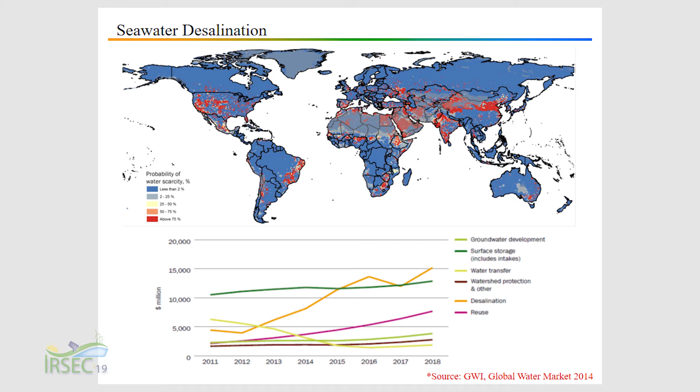We all know desalination is the fastest growing market in water treatment, and this was actually the prediction for 2018 - we almost doubled that prediction in market share. So desalination is going to grow further, and because of the energy consumed by desalination, either thermal or membrane, we will have to consider it as a major energy outcome from wherever we are working.

So first, the thermodynamic limits. When somebody talks about energy, when you mix salt and water there's a certain energy release - it's called the Gibbs function here, and it's the basis of the second thermodynamic law. If you mix salt and water, the release of this energy has to be given back to the system in order to separate them. This is the law. This is the thermodynamic law. You cannot break this law.

So we have to understand first, if you want to separate water from salt, you have to give back this energy. This is the mixing energy, and in desalination we call it the Gibbs free energy of mixing.

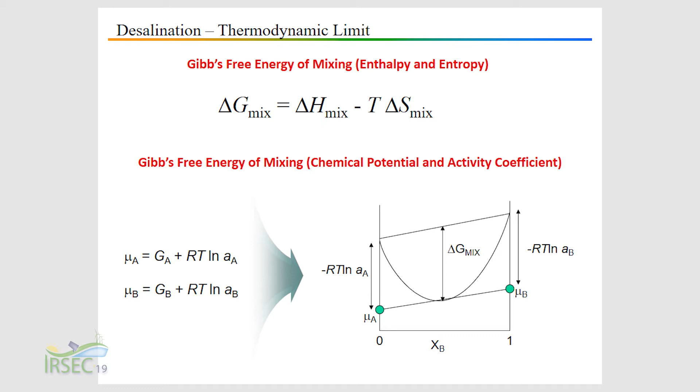If you look at the thermodynamic limits, we can convert this into pi, which is the osmotic pressure. So this mixing energy is directly related to osmotic pressure, and by using this osmotic pressure we can calculate how much hydraulic pressure we need to reverse it. If we have enough hydraulic pressure in the opposite direction of the osmotic pressure, then we can start creating water. The reason we do this depends on, in desalination, how much water you want to draw - a 40% recovery needs a different hydraulic pressure than a 60% recovery. The reason is this process is dynamic.

At the beginning of desalination, you might need only 15 bar of pressure, and that's for the zero recovery point. But if you want to remove 50% of the seawater as drinking water, you have to apply the osmotic pressure at that concentration. So this is very important - when somebody tells you about recovery, the most important thing is what percentage and what pressure you want to use.

Of course, we add around 20% additional pressure to compensate for the losses within the system. So we have a process running at this pressure, and you have irreversible losses from the process itself that you cannot recover. This is based on the thermodynamic limit.

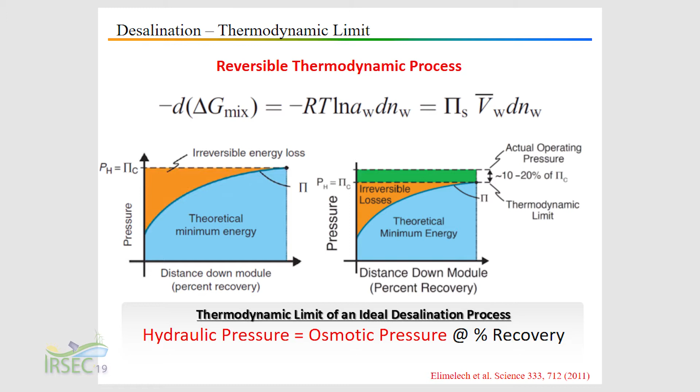If somebody talks about the thermodynamic limit in an ideal desalination process, which means there are no losses, your hydraulic pressure has to be calculated based on the osmotic pressure at the percentage recovery. If you go to the Middle East where you have seawater of 56,000 TDS, at that point 50% recovery doesn't make a lot of sense - 50% recovery will put your brine at 120,000 ppm, and at 120,000 ppm you need around 100 bars of hydraulic pressure. So we have to be very careful about which water we are talking about, which recovery we are talking about, and what the conditions are. There is a lot of misinformation in the water sector.

A lot of people come and claim, we do this, we are the best, we can do 60% recovery in this water. We have to approach it in a much more careful manner.

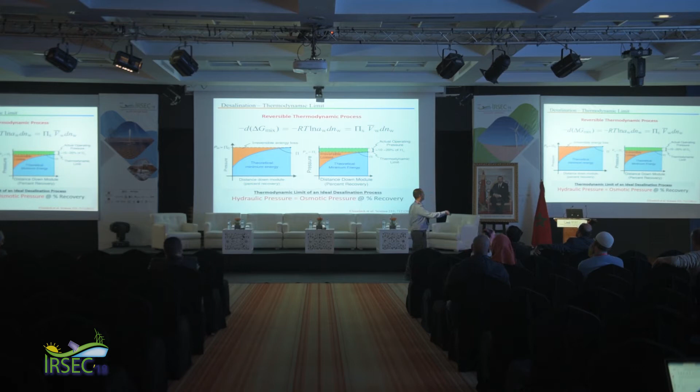If you look at the minimum theoretical energy consumption, if your TDS is 35,000, this is around Mediterranean Sea level, at 0% recovery when you get the first fresh water out of the membrane, the first drop, you have to put at least 0.7 kilowatt hour per cubic meter of energy to get that first drop out.

If I want 50% recovery from the Mediterranean-based salinity water, you have to put at least 1 kilowatt hour per cubic meter. So this is the thermodynamic limit for this TDS and for 50% recovery.

It will be different if you go to the Middle East, it will be different if you go to the Black Sea between Turkey and Russia, it will be very different in Singapore.

The other thing is theoretical and actual energy consumptions are also different. The theoretical minimum we said was 1 kilowatt hour. You have 20% practical losses from the pumps, from everything, so let's say 1.2. The actual minimum for SWRO, because we have a lot of losses along the way, a lot of pumps and recycles and whatnot, is 2 kilowatt hour per cubic meter.

However, this does not include any pretreatment, any intake, any post-treatment. If we include all of those, the number you get is between 3 and 5, depending on a lot of different things.

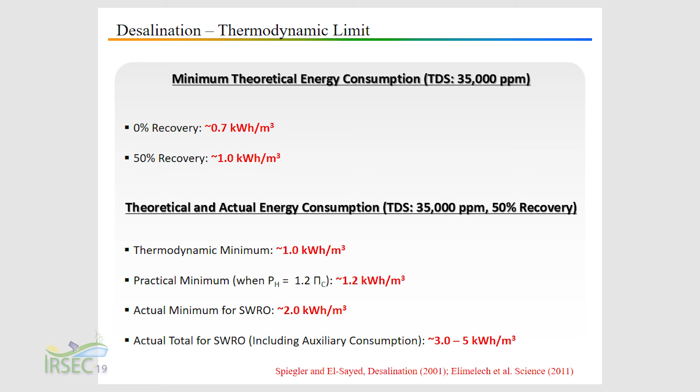So if you look at it, where we can save the money, where we can save the energy, is based on osmotic pressure here, in the reverse osmosis process, which is only just below 70%, and 41% power for the entire system. So the actual energy savings here is already capped at 30%.

If it's a zero energy process, the maximum you can save is 30%. So you have to be very careful.

And this is what we come from. Before this device, called an isobaric pressure exchanger, it recovers the pressure from the brine and gives it back to the inlet. Before that, we were working around 7 kilowatt hour per cubic meter.

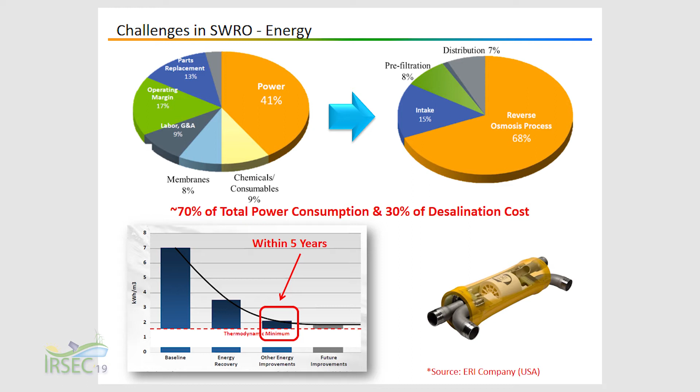What happened after this device, we went down to 3.5 depending on the intake. Now what we are looking at is right about 2 kilowatt hour per cubic meter, because your thermodynamic minimum is right here. So we are hoping within 5 years.

This is a typical desalination plant. This was done for high TDS seawater in Qatar. We did this one for 42,000 ppm. You have intake and pretreatment.

You have a fixed power consumption, first stage SWRO and second stage BWRO. Why do we have two stages? Because membrane desalination does not give you enough water quality in the first pass. Almost every case, we have two stages.

We have to bring the TDS around 25 to 50 ppm so we can reconstitute it with calcium carbonate. Otherwise, it will be very dangerous to the distribution line.

So we have two stages of reverse osmosis and an outfall structure. This is around 3.8 kilowatt hour per cubic meter.

The only possible energy saving here is from the first stage SWRO. Why? Because all the other processes are already being optimized years and years in advance.

If we look at it, if we calculate what is the minimum theoretical and applicable maximum specific energy consumption reduction for the whole process, for the SWRO process, it's 23%. We can reduce only this part by 23% if we apply new technologies.

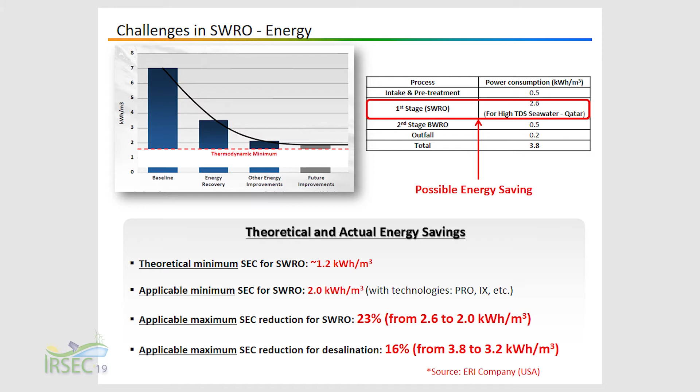If we expand this to the entire process, our savings should be capped around 16, maximum 18%. So this is the limit we are working with. No matter what technology you come up with, no matter what you do, this is the savings you can add to the process. So this is very important to start with.

The reason I'm going here is because the first thing I want to talk about is forward osmosis. When forward osmosis came out, they said this is a natural process. You don't need any power, you don't need any pressure, the water just flows by itself.

But again, that flowing water by itself - on the other side, the draw solution, you have a very high osmotic pressure, which means that osmotic pressure already has a Gibbs free energy of mixing already released. Then you have to separate that, the draw solution. So that was a big problem.

And we learned a lot of stuff. We can say 50%, 60%, I will produce water for free.

We heard a lot of things for 10 years. A lot of people get a lot of projects, they get very famous. But now, when we look back, we can see the difference between what really happened and what was promised to be happening.

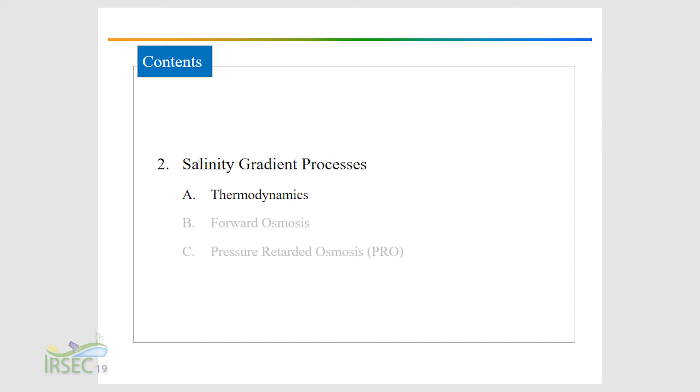First, the thermodynamics. I'll go simply. Let's say we have an osmotic agent here, and a feed water, and we separate them with a membrane, a selective membrane. If we do nothing, the feed water with no salt will flow through the membrane and increase the volume on the osmotic agent side. This is forward osmosis, a natural process.

We can add additional pressure to the feed water and increase the flow rate from feed water to salt water. This is called pressure enhanced osmosis. We can also apply just enough pressure to the osmotic agent, not enough to stop the flow, but enough to keep the pressure constant and sustain a suitable flow from one side to the other. So in pressure retarded osmosis, we are not reversing the direction of the flow.

If you apply enough pressure on the osmotic agent, then this is reverse osmosis, and you can produce fresh water. So this is basically the mixing of salt water and clean water. We have oceans, rivers, a lot of different salty and non-salty water sources. It's predicted that we have 1,700 terawatt hour global potential coming from this.

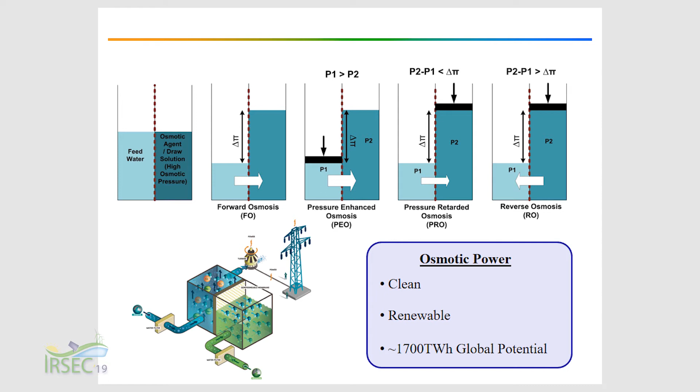But there's also an exergy idea of how much of this power can actually be converted to workable energy. If we're talking about 5 ppm salt water with 0 ppm salt water, mixing this won't give you any energy because it's so small that the power you're trying to recover is lost in the system, since your system has inefficiencies. Nothing is perfect. So for the thermodynamics, this is the flux.

What I want to say here, I'm not going to go into too much detail. All the research we do about forward osmosis, we use reverse osmosis experiments to find the constants. For example, A here is the permeability constant for the membrane. We find that by using reverse osmosis experiments, which doesn't make sense because as we saw, the flow patterns are completely different. We don't have positive pressure in forward osmosis. On the other hand, reverse osmosis is based on hydraulic pressure.

We also use this experiment to find the salt permeability coefficient the opposite way, and we calculate our S parameter, which tells us the thickness of the membrane we need. It's very important for membrane development. We found all of these by only using the reverse osmosis experiment. So there's a big mistake we are making, and when we have experimental results coming from this approach, that S parameter is very different from what companies actually find, like Toyobo, Toray, when they apply this in the process.

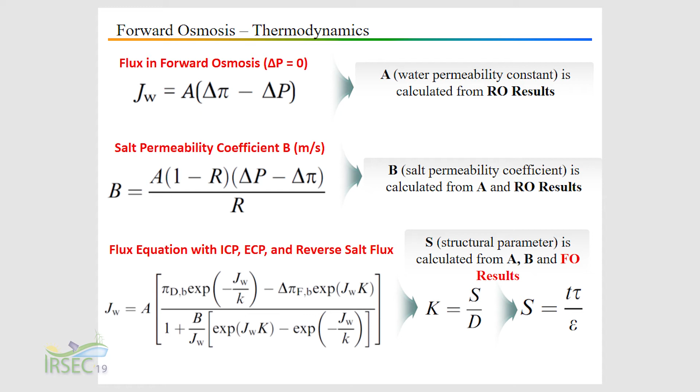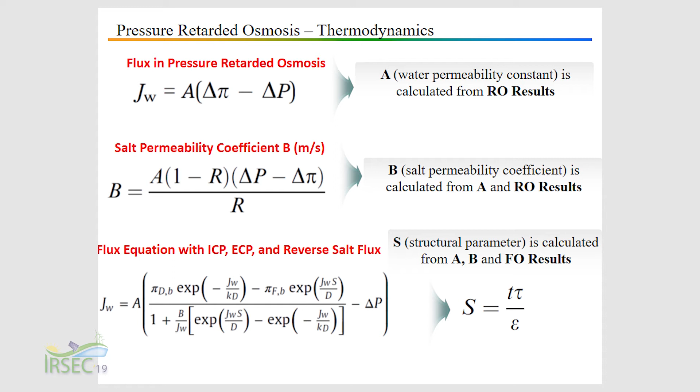It's very similar to forward osmosis. The only difference here is now we have a hydraulic pressure on the same side as the reverse osmosis, but again the flux and the salt reverse flux are in different directions. What we do here, we again often use reverse osmosis experiments to find these constants and important parameters, and then we calculate our process and how efficient our process and membrane are in this application.

We start with forward osmosis. There are a lot of mistakes we are making. First, the forward osmosis itself: we have a draw solution, high concentrated, and a low concentrated feed solution. If we give these to an FO system, water will flow through the membrane without any pressure requirement. However, when you have a diluted draw solution, this includes your product water as well, so the water drawn through this membrane is now mixed and not pure and clean. You have to have a very solid recovery system to recover the draw solution back to its original concentration, so you can have a high osmotic pressure to draw, and you need a product that's pure enough to be used as drinking water.

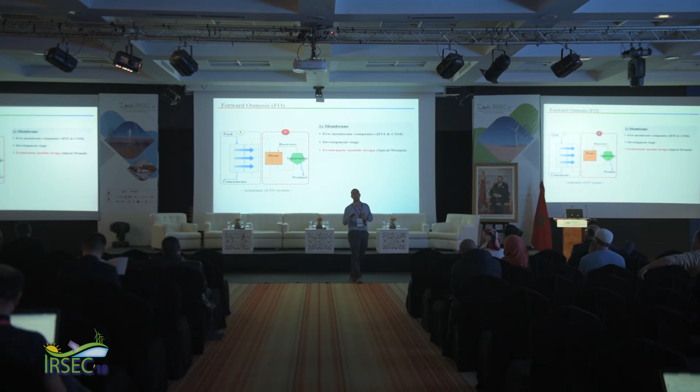First problem we have is the membrane. We generally have flat sheet membranes that we can engineer using the S parameter I mentioned. We can make it very thin, microvoid, and use a lot of other techniques. However, the spiral wound module is a big problem. We have a huge dead space, around 70% of the surface area is lost. I'll talk about it in the next one.

And for the hollow fiber, we don't have a lot of companies working with it. We have two big research groups from Singapore that focus on hollow fiber membranes, but there are no membrane companies actually supporting FO membrane production in hollow fiber form.

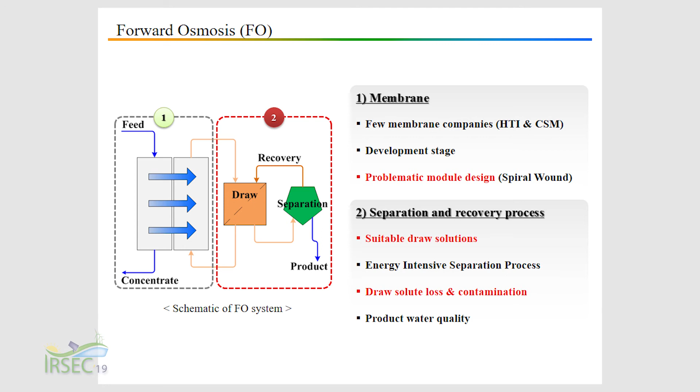The biggest problem, however, is the separation process. This separation process actually requires more energy than the desalination itself. That's why we don't have a lot of direct application of desalination when it comes to FO, but FO has been around for 12 years. If there was a potential, we should have seen it by now. So we need to find a suitable draw solution that has a very high osmotic pressure and can be separated from the product easily, which, as we saw, is thermodynamically almost impossible.

You have to have a magic draw solute. And even if you have a way to separate the draw solute efficiently, the FO membrane is not perfect, meaning you have a reverse salt flux, so you're losing draw solute every time. Even if it's 0.1%, after 100 batches you lose 10% of your draw solute. Similarly, you're not rejecting 100% of the salt from the FO membrane, so you're poisoning your draw solute with salt while also leaking draw solute through the membrane. After 5 to 10 cycles, your draw solution is useless. You have to dump it and put in a new one. So there are a lot of issues.

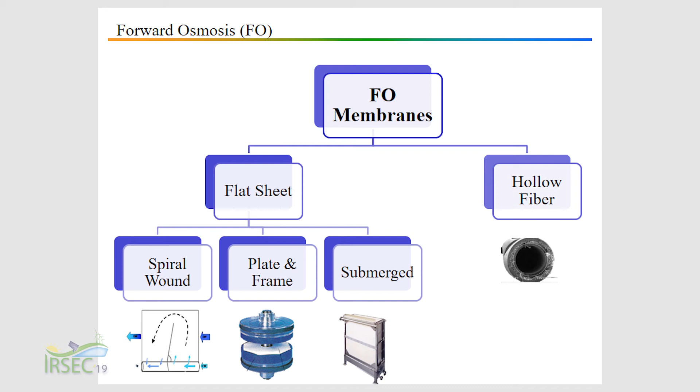For the membranes, we have flat sheet membranes. A lot of research goes into flat sheet membranes because they're easier to work with and companies are more interested. For modules, you have spiral, plate and frame, and submerged configurations. We tried almost all of them over the years. Some work, like submerged, but then you have a problem with packing density—you need a huge area to apply submerged FO processes. And we have hollow fiber membranes, but as I said, not a lot of companies are interested.

Flat sheet membranes—CSM, now Toray Korea, and HTI—are very interested in this. This is a flat sheet membrane. You can engineer the microvoids, adjust the S parameter and the thickness. It's a highly engineerable product. However, when you put it in a spiral module, because of the shadowing effect in the forward osmosis process, these envelopes collapse on themselves, and you lose around 70% of the active area. So in the laboratory, you try a little coupon and get huge flux—70 LMH, 90 LMH. You roll it into a spiral wound module and get 10, if you're lucky. The reason is you don't have a good system to pack all those membranes into an applicable configuration.

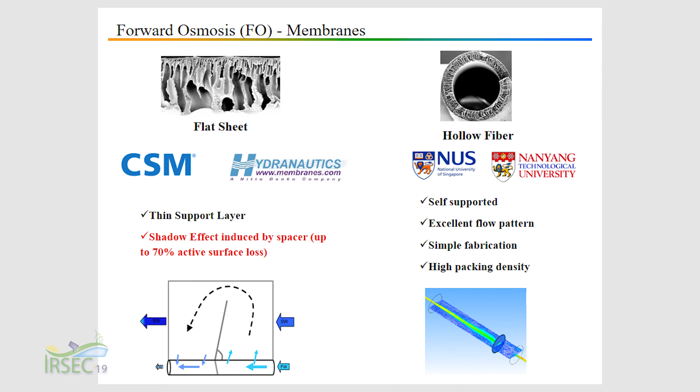Hollow fiber membranes are perfect. They are self-supported, meaning you can keep the S parameter as small as possible—you don't need much support layer. You have an excellent flow pattern because everything flows on one side, and you can use 100% of the surface area. It's simple to fabricate, and you can have twice the packing density compared to flat sheet. However, none of the big membrane companies believe FO will actually make it in a hollow fiber format, so there's no commercial future at the moment from the membrane companies.

We tried many draw solutes over the years—inorganic volatiles, organic volatiles, polymeric membranes. The idea is how we can create a huge osmotic pressure and then remove it with low energy. So far, after 12 years, there isn't one draw solute that can make the desalination process more efficient than reverse osmosis itself. So there's a big problem for the research.

If you want to do direct desalination, you could use FO maybe for seawater pretreatment—maybe, depending on the seawater quality. It doesn't mean it can be applied everywhere. But you still have a lot of problems with draw solutes and draw solute recovery, and you have to look at rejection efficiencies and reverse salt flux problems. If you want to use it as part of desalination and reuse, you use treated wastewater on one side and dilute your seawater with it, which lowers the osmotic pressure on the seawater so you can reduce energy consumption in reverse osmosis. However, again, you have a problem with pretreatment, because even though people say forward osmosis doesn't foul, it does foul—sometimes more than reverse osmosis itself, because you don't use much pretreatment for forward osmosis.

If you do use pretreatment, then you actually don't need FO as a pretreatment for seawater. You will still need a guard membrane, probably a UF, you still need a DMF, and probably a DAF, depending on what kind of water you are using.

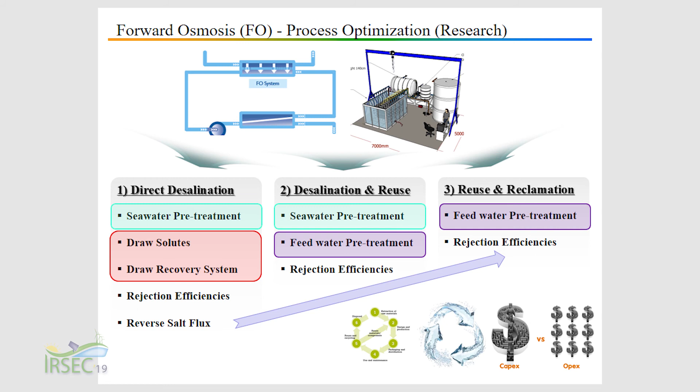You can just use it for reuse or reclamation, where you are not trying to produce water, just using this as an addition. Or you can use it in a niche application like they did in Australia. They used very concentrated fertilizer, so you can ship it in a small container, and on site they can use forward osmosis to dilute it before giving it to the crops.

Or like they started in China, you can use it for juice production. When you're concentrating juice, you can use forward osmosis. You put high sugar concentration on one side as a draw solution and juice on the other side, concentrating the juice and diluting the sugar water. What do you do with this sugar water? You rehydrate dried fruit that comes from Africa or South America. So there is no waste, but there is a niche application.

However, those niche applications don't include any desalination, okay, so far.

Of course, we always have to look at the CAPEX, capital investment, how much you are paying. When you add forward osmosis to a reverse osmosis process, you increase your CAPEX around 60%. So it's a huge investment, and you have to make sure it's compensated with operation cost savings.

The second one is pressure retarded osmosis. In this case, we are not talking about water production, we're actually talking about energy production. So our end product is different. We can actually produce energy directly by mixing salt and fresh water.

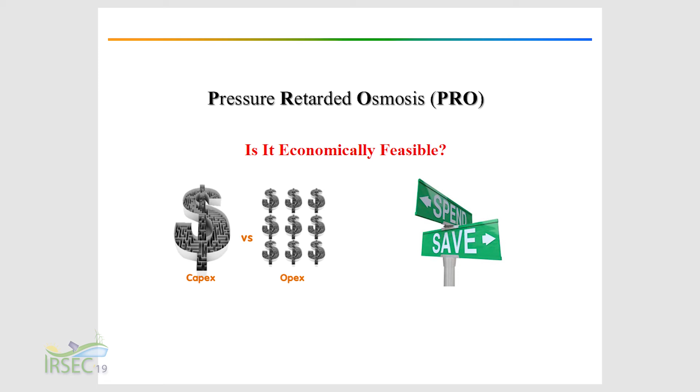The question here: yes, this process works, but is it feasible? To know the feasibility, again we have to look at industrial level. Even if we are doing research in the laboratories, you have to have a roadmap to see if this can work in the real world. So pressure retarded osmosis, as I explained, you apply enough pressure not to reverse the flow, but enough to keep the side pressurized. Why are we doing this?

Let's consider this as a membrane module. This is your pressure retarded osmosis membrane. You have high pressure, high salinity draw solution coming on this side, and low pressure, low salinity feed solution on this side. Because of the osmotic difference, you have water drawn through, and what happens here is your pressure stays almost constant. We proved this in industrial scale: you reduce your salinity by increasing flow. The basic energy in thermodynamics is PV, pressure times volume. If you keep the pressure constant and increase the volume, you increase the internal energy of the system. So this is the basics of pressure retarded osmosis.

This is an osmotic-to-hydraulic pressure conversion. You had an osmotic pressure difference here, and at the end you have higher volumetric flow rate with the same pressure. So you are converting the pressure of this drawn water to hydraulic pressure. It's a near isobaric process, meaning the pressure does not change on the draw solution side, and increasing the flow rate in this direction directly increases the workable energy.

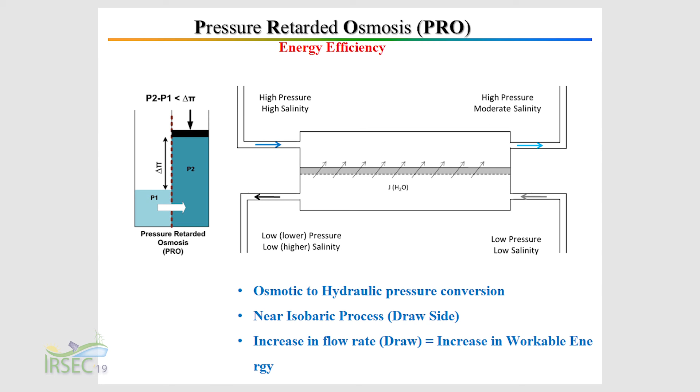Here's a good example. The first one is a commercial process tried by Statkraft in Norway, and they ran this system for around 2 years. They failed, and that was a very bad reputation for pressure retarded osmosis, but I will explain why they failed later. They tried mixing seawater and river water. This is their membrane process, this is the pressure exchanger, this is the hydro turbine, and that's electricity. They put a 10 kilowatt capacity PRO process in place, and ran it for 2 years.

The second system came in Japan with the Megaton project. They have a full-scale process in Fukuoka Island, and it's still running. In this case, instead of using seawater, they used the brine from seawater reverse osmosis and mixed it with treated wastewater. If you're coming from water-scarce countries, in Norway the seawater and river water may not mean a lot, but in most areas of the world these are very valuable water sources. Those are resources, especially in places like the Middle East, Singapore, or any water-scarce location. So what the Japanese did is use absolute waste to run this system and produce energy.

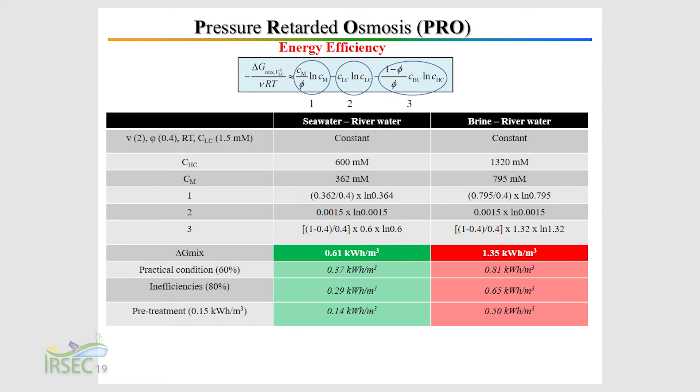Looking at it more thermodynamically, theoretically, this is the Gibbs free energy I've been talking about. If you have a seawater-river water process, the maximum Gibbs free energy you can produce or utilize is 0.61 kilowatt hour per cubic meter, given these concentrations. However, if we use brine-river water, it's 1.35. So you have a much bigger application.

What they did was use a pressure exchanger and a booster pump before the PRO and a Pelton turbine. By applying this additional process, the blue one is the regular SWRO that we all know. You have a pretreatment, a high pressure pump, a pressure exchanger to recover pressure from brine, and a booster pump to compensate for pressure loss. From here, if you apply a booster pump and a pressure exchanger, you can increase the pressure for pressure retarded osmosis, and with the brackish wastewater, you can produce energy.

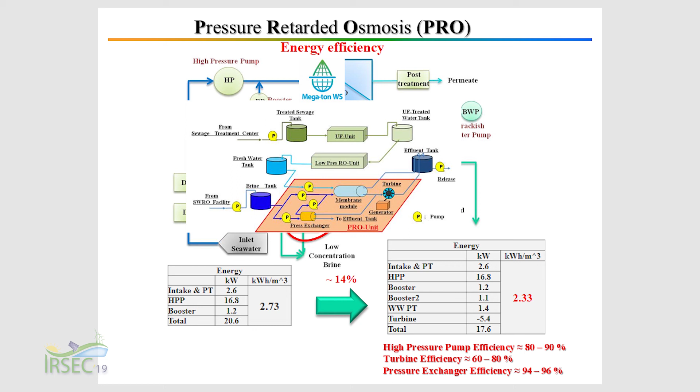The energy saving comes from here, but the Pelton turbine has 60% efficiency, and your booster pump has 90% efficiency. Applying this in a real process, you can reduce energy consumption by 14%, which is very good, and this is exactly what they did in Japan.

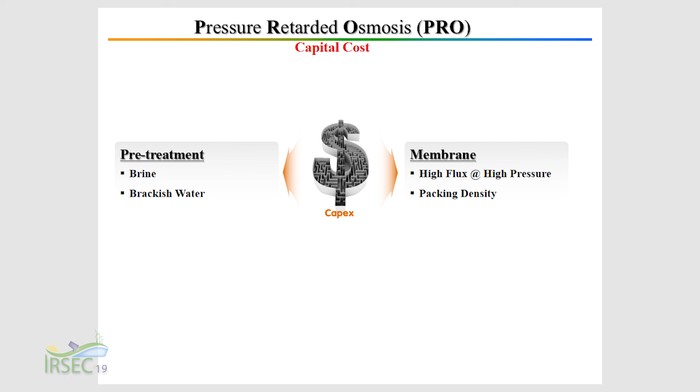Is it feasible? Not yet. We still have to talk about the pretreatment, and we still have to talk about the membranes, because if you have a good membrane, it means you don't have to use a lot. You can use a certain amount, which reduces your cost.

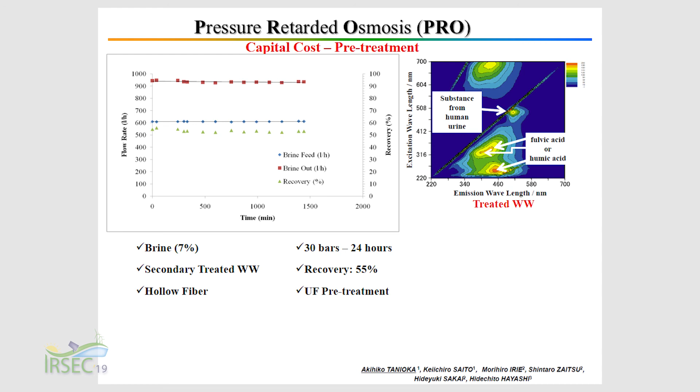When we look at the pretreatment, seawater brine doesn't need a lot of pretreatment, it already went through treatment. But treated wastewater has a lot of organics, fulvic and humic acids. However, you can simply employ a UF membrane to treat it.

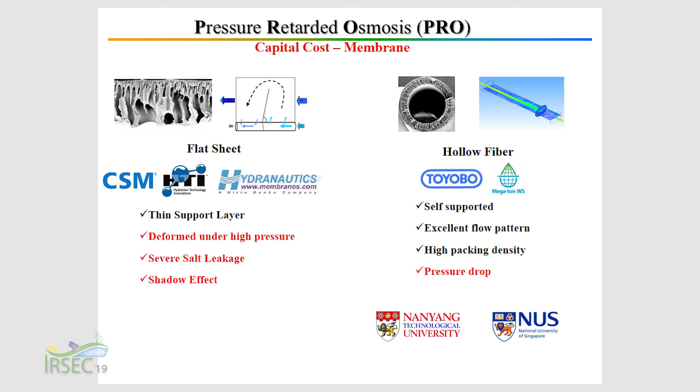Hollow fiber, now we have a company, Toyobo. They are the only hollow fiber reverse osmosis membrane producer, and they do believe that hollow fiber PRO can work. They are supplying the membranes in Fukuoka Center.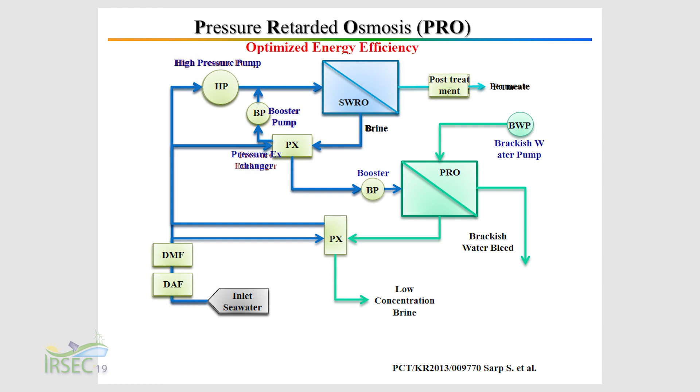What we did in Korea, this is what I did. Instead of using two different pressure loops, we added another pressure exchanger, and we extend the loop from PRO to the inlet line. So we use the same idea we are using with SWRO, but we extend it to pressure retarded osmosis and pre-pressurize the entire inlet.

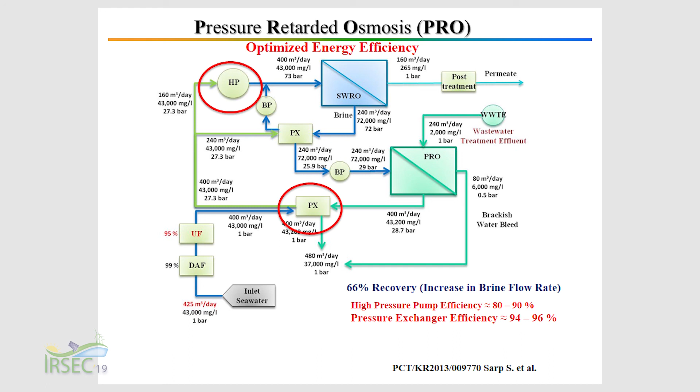I will skip the details, but the most important one: instead of using a Pelton turbine to produce electricity, we didn't convert it, we just exchanged it and gave all the pressure back to the system itself. In this way we also saved from the high pressure pump, because our inlet is now not 1 bar, it's 27 bar. And if you look at the efficiencies, this has additional extra savings from the energy.

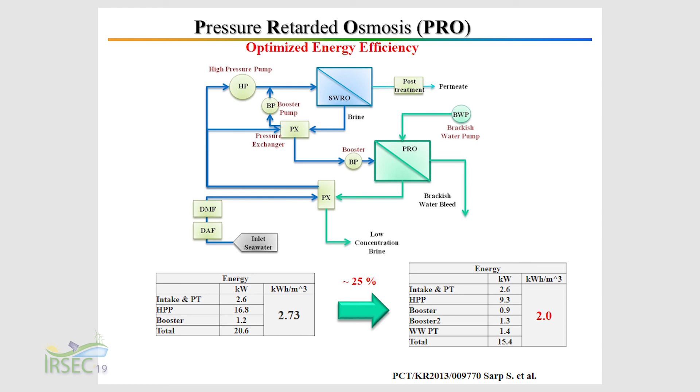We found that this is a real process that we applied in Alicante, Spain. We can reduce the energy consumption for the whole system around 25%. So this is a very exciting one. But again, we have to be very careful, it depends on the membrane quality.

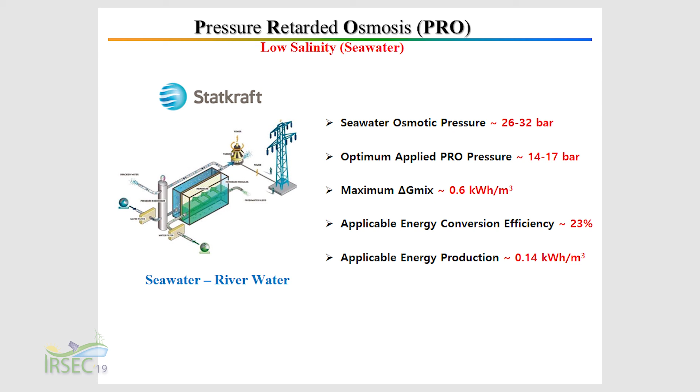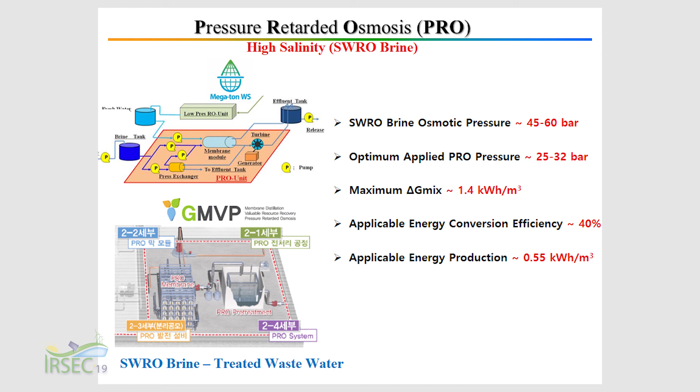Just to summarize, when you look at low salinity seawater or river water, you start with low osmotic pressure, so the applied PRO pressure is low. The maximum you can get is 0.6 in optimum conditions, however the applicable part is only 0.14. If you use seawater brine, which is a waste, and treated wastewater, then you can get up to 1.4 kilowatt hour per cubic meter energy production, or recovered energy back to the system.

And it comes to a new idea when you have ultra high salinity water. This is Dead Sea, but it's not limited to Dead Sea. If you know oil and gas applications, the produced water from oil and gas industries can sometimes reach 200,000 to 300,000 TDS. We are talking about a Gibbs free energy of mixing potential of 9 kilowatt hour per cubic meter. You can run 3 desalination plants by using this.

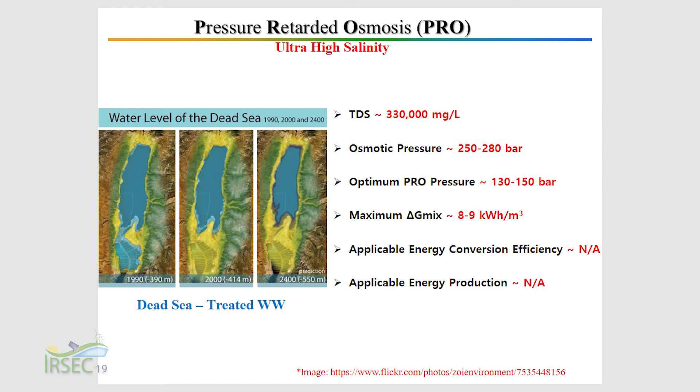However, at the moment, we cannot convert this to a real energy application. The reason is the optimum osmotic pressure here is around 300 bar. In order to get the maximum energy out, you need a membrane that can give you a positive flux at 150 bar, which is physically not possible at the moment. So we are looking at different applications, how to tap into this potential.

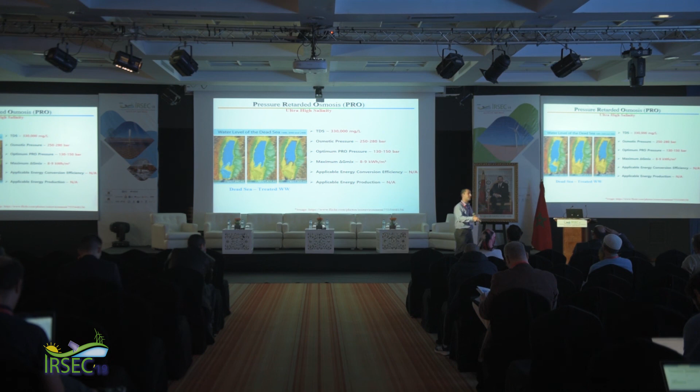And we have a new paper coming next week, hopefully from Desalination, where you can check how we try to optimize that one.

Conclusions: you need high pressure osmotic difference for PRO. You need niche applications for FO if you want to use it, like juice concentration. Low turbine efficiencies limit your PRO application for energy production. And exchange is more feasible than convert when it comes to energy. SWRO-PRO process can be commercialized if you have a good membrane.